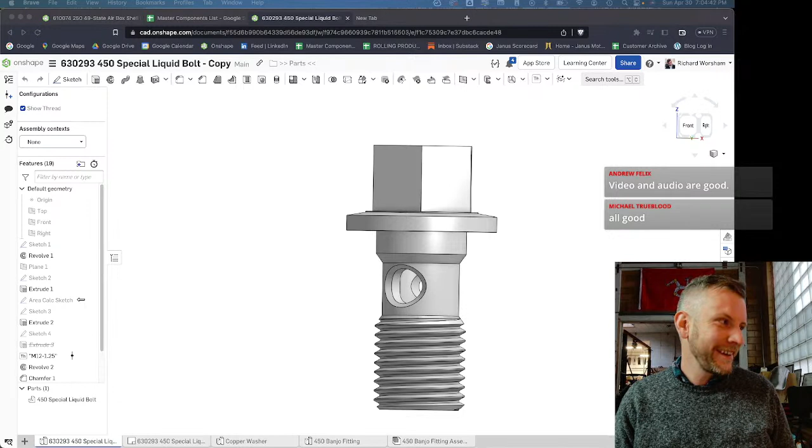I've been traveling a lot over the past week and a half. I went out last weekend and attended my high school's 20th year reunion, which felt like it snuck up on me, and it was big enough for me to make it back. I went to a pretty neat old school, and it was good to see everybody. Most of the people I had not seen since I packed up my stuff and left, but it was good to be back and to kind of reforge those connections.

But then I headed out, got back here, and then headed back to DC on Tuesday for an event with Google, which we had not really done anything with them in I think 5 years, since they did a video on us featuring how we use their products. And they had kept up with us. A couple of people on the Google film crew actually bought bikes, and we really had a good time with them. Treated them to some Midwestern fun, big bonfires, and they had, I think, got a lot out of it and appreciated not being in either Mountain View, California or New York. So it was a lot of fun.

Anyway, I went out there, got a chance to meet, not with the actual senators, but even the office of Rand Paul, because he's to the south. And the woman in the group I was with was from Kentucky, so she wanted to speak with her representative, and then we got to speak with our representative. Both of them represented by staffers, not by the actual politicians. But I got a little taste of Washington D.C. politics and the machine. So I'm glad to be back. Let's just say that, it was something else.

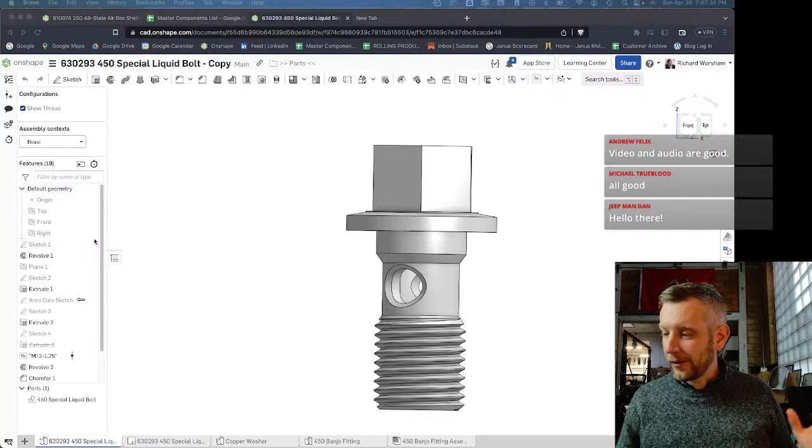Michael Trueblood, another good friend of the shop and a woodworker, he's got some cool features on his bike, says all good. And Jeep Man Dan, as always, man, you are the live stream, as Grant would say, true blue. So good to see you all on. As always, this is so much more fun when we have a conversation, so interrupt me, tell me what I'm doing wrong, whatever. I love having the conversation.

Anyway, we do have quite a bit to get through, but as always, I'm going to bore you all to death with a poem, and this time we're going to read. This one is kind of neat because, well first of all, it's Robert Frost, and we're not going to do Richard Wilbur this time around. It is about just working, and it's about the experience of working with other people and the unspoken rules of interacting with other people, and how you do that successfully or you don't, and the repercussions. So this is called The Code. It's a little longer than the ones I've done so far. I hope I don't bore you all, but if not, you can pause and come back when we get to design. We do have quite a lot of design work to get through, so I'll try and make this quick.

But I would encourage you—it's just, Frost is so good because it's blank verse. He just speaks, and it doesn't come across as overwrought or anything like that. So we'll go ahead and get started.

The Code, by Robert Frost. There were three in the meadow by the brook, gathering up windrows, piling cocks of hay, with an eye always lifted toward the west, where an irregular, sun-bordered cloud darkly advanced, with a perpetual dagger flickering across its bosom. Suddenly, one helper, thrusting pitchfork in the ground, marched himself off the field and home.

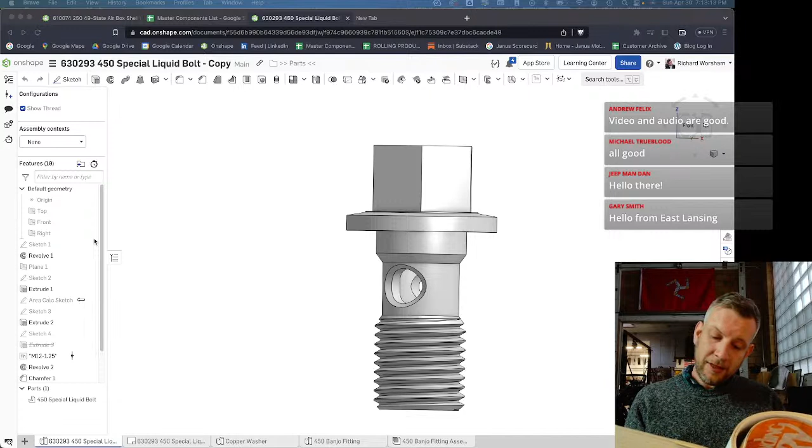They told me afterward. First, they forked hay, a lot of it, off of the barn floor. Nothing. They listened for him. Not a rustle. I guess they thought I'd spiked him in the temple before I buried him, or I couldn't have managed. They excavated more.

Go keep his wife out of the barn. And someone looked in a window, and curse me if he wasn't in the kitchen, slumped way down in a chair with both his feet against the stove, the hottest day that summer. He looked so clean disgusted from behind, there was none that dared to stir him up, or let him know that he was being looked at.

Apparently I hadn't buried him. I may have knocked him down. But my just trying to bury him had hurt his dignity. He had gone to the house so as not to meet me. He kept away from us all afternoon. We tended his hay. We saw him out, after a while, picking peas in the garden. He couldn't keep away from doing something.

Weren't you relieved to find he wasn't dead? No. And yet, I don't know, it's hard to say. I went about to kill him fair enough. You took an awkward way. Did he discharge you? Discharge me? No. He knew I did just right.

I love that one. I won't say any more. That's a good one. Okay.

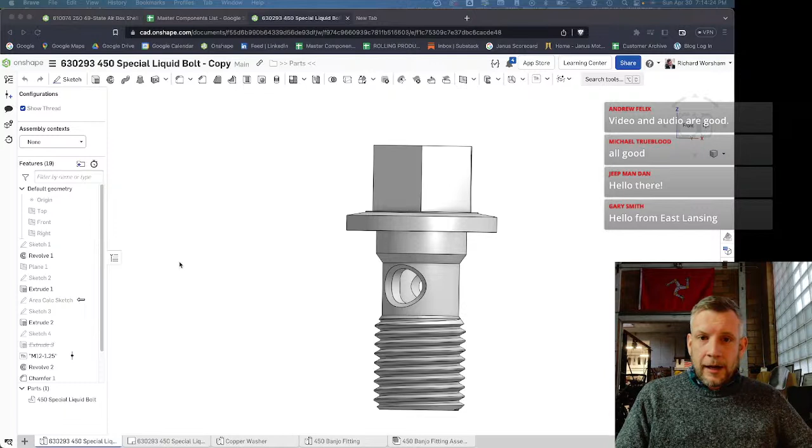Okay, let's do the hard one first. We're going to design, not the thing you see on your screen, which is this little guy, right? Let's see if I can show it here. An update to this. But instead, we'll get to that. We're going to do a part for an air box. Boom, if I can figure this out.

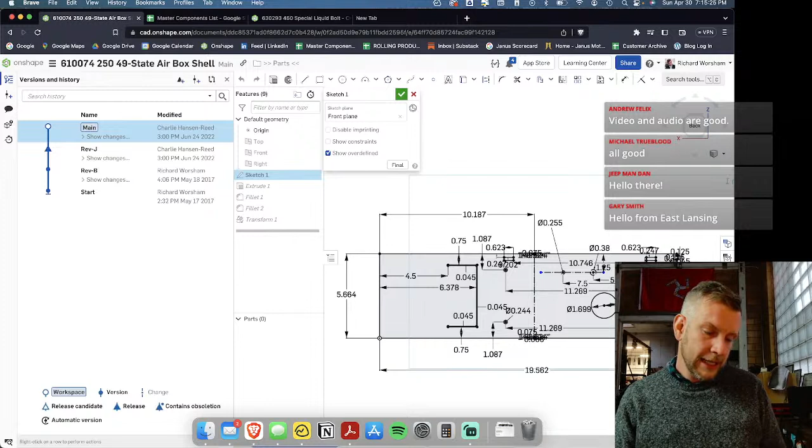I've done this twice, this is the 250 air box. Basically the problem is that the door panel is somehow, in the last year or so, something has changed in the way that we're making it, and it's slightly off kilter. So we have to kind of cheat it over a little bit. Ryan, our assembly lead, has tasked me with correcting that. I'm going to try and make sure it goes the right way, because the last time I did it perfectly, except it went even worse. So we're going to fix this, I hope. So let us get started.

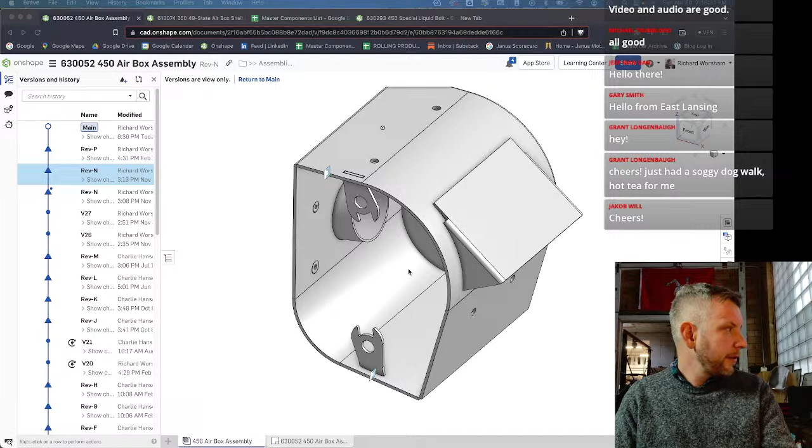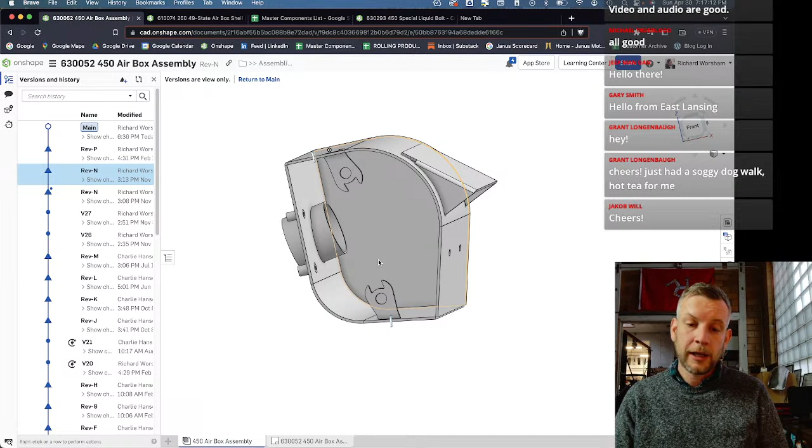It's a little narrower. It has a different slot at this thing right here, this little hood you see on the back that's yellow now, is actually the air intake. And it slides up in there, and then that prevents any gasoline vapor that's trapped in here from escaping. It's up high enough that gas vapor will always settle, and so it helps us with our California vapor, the evaporative emissions. Anyway, I'm just giving you an idea.

If we move these little yellow things that I'm highlighting yellow right now, they hold clip nuts, which are little metal nut clips that fit on and have a threaded portion. They hold those, and that's what you screw the door panel onto. And if they get off at all, then it can make the door not align properly. So I'm showing you on the 450 there.

We're going to adjust in the flat pattern because we haven't gotten up to, this is kind of a holdover from when we used to do everything in 2D. I haven't put it into 3D yet, which I need to get around to, but that would be a much longer Ramblestream if we were going to do that. So we're just going to correct this.

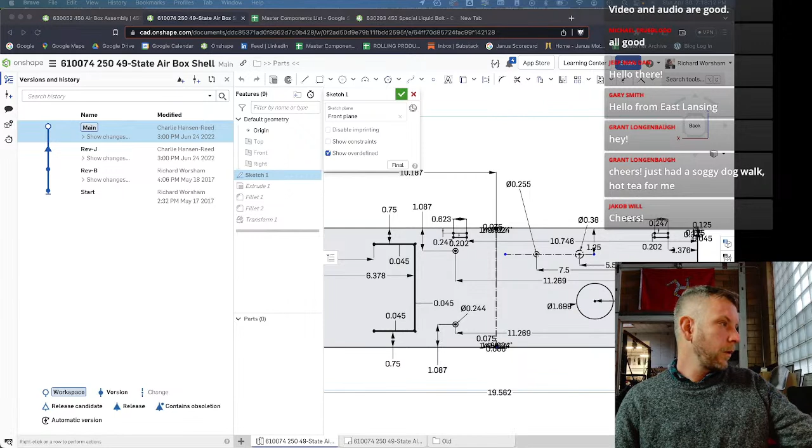So in order to do that, what we need to do is move, and I've already done the math here. We need to move these tabs essentially 0.1 inches over, and we're going to actually move it toward the left. Do you see these little slots here? I hope everybody can see what I'm talking about. I'll zoom in and you'll see. These position those little tabs that hold the clip nuts that then lock at the door.

Once this whole thing, with this big rectangle - I should really back up. This big rectangle you see is what we call a flat pattern projection of this. So if you were to unfold this piece of metal here, it would look... see what I'm saying there? See that little slot right there? If you were to unfold that, it would end up looking like this. So that's what we're doing.

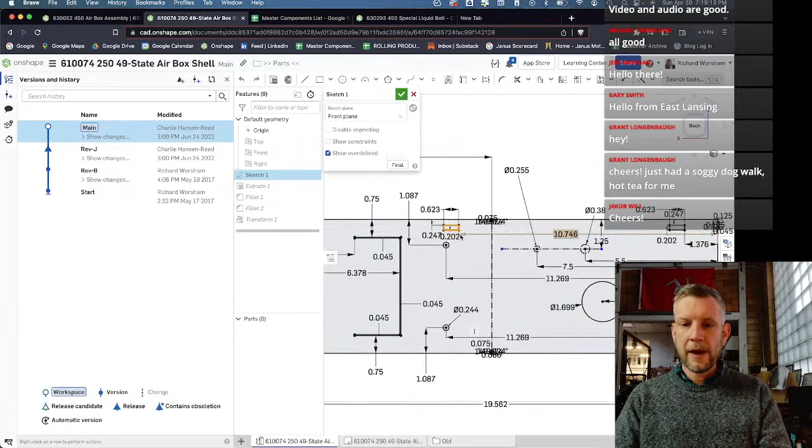So if I move these a little bit one way, it's going to help correct that door. We've already calculated that, so just so you understand. Now I'm going to go ahead and do that. All I have to do is add, we'll just go up by .1. There we go, did that one? See, all I'm doing is changing the dimensioning, redefining it. And we'll do the same thing here.

And that's pretty much it on that air box, I believe. And what we can do, just to be sure we're not messing it up, is compare. Let's see if we can compare it with what was before.

This is a kind of a cool feature in Onshape, the design software we're using, where I can compare two versions. You see I've highlighted - let's make sure y'all can see what I'm looking at here. Yeah, you can see the red and the blue there. The Rev J would be the last revision, made by Charlie on June 24th last year, and now we're updating it again. The red represents what that revision was, and the blue is now the main. We haven't released this yet, it's just where I'm working.

So if we look over here, I'll try and make this visible for y'all. You see, here's the piece we just modified, and there's a little slider up here. Can you see what's happening there? It's showing a comparison, just so you can visually check what you just did, and that looks perfect. We've moved from the slots being on this side, and now you're seeing, in reverse, the other side. So we've just adjusted those panels so that the door sits better.

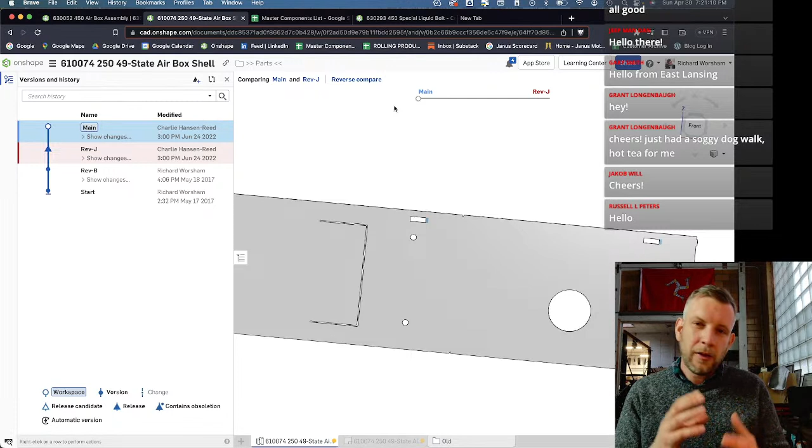I can't explain, none of us are really sure why it got off, but there was something in either the way it's being bent or welded that's changed slightly, and it's so consistent. It's been happening long enough that we know it's something that we can fix without it throwing off the other direction. So we're going to go ahead and do that. That's pretty much it right there, that was a really easy update.

We're going to go back to the main, get rid of the comparison. Let me see what the comments say. We got Jacob Will, it says cheers. Russell Peters says hello - hello everybody, good to see you all. Share what you're drinking, if anything.

So now we've got that up there. I'm going to go ahead and update the print. We'll just make sure this is good.

I'm going to increase the size of this revision block just because it gives us more room in the future to write a good description, and it also allows us to narrow those out.

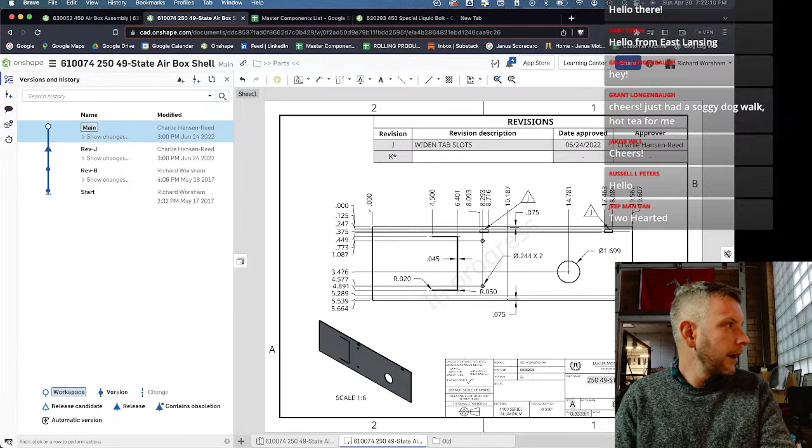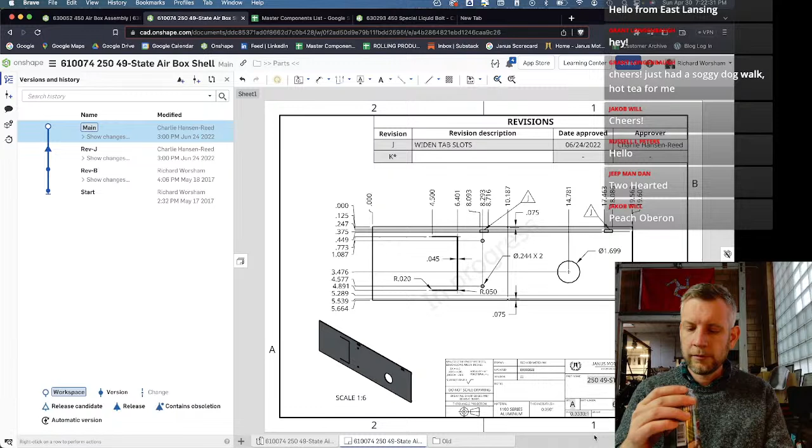Jeep Man Dan says two-hearted, a closer Michigan relative to the north. So that one, Two-Hearted is from Bell's, which is in Kalamazoo, or Comstock, and Founders is from Grand Rapids, I think. Yeah, Grand Rapids, I think. Yes, it's from Grand Rapids. I love All Day, and Two-Hearted is one of my personal favorites. Peach Oberon - Jacob, what's that? Oberon, Peach Oberon. Who makes that?

Okay, let's go ahead and increase the revision table. I'm just going to say adjusted. Remember, you don't put too much information, you just say you changed adjusted door tab slots. I'm not going to put any dimensions in there because the dimensions have automatically updated here.

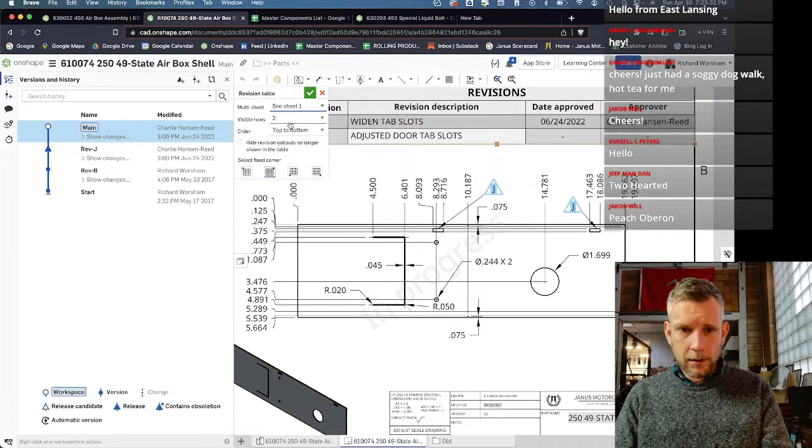I forgot to show you all, I updated it automatically, so they're going to be corrected automatically. And what we will do is make sure that we'll hide any previous ones, and then we'll add a K.

So this is what we're doing right now, is adding a revision callout. If you've been on one of these streams before, you'll remember that. So adjusted door, this revision is a revision table. It shows what's changed. So if the vendor is looking at this, they can quickly tell, instead of going through every single dimension and seeing what changed, you can highlight what's changed so that they know where to look. It just saves everybody time.

So in this case, we've made K as the number of this revision, or it will be when we release it. That's why it has a little asterisk next to it, and why it says in progress across the watermark. This little K will move down to where we have adjusted it, which would be this guy right here. We'll do that guy, that one, and then we'll put a second one on the other one. I'll just put it over both of them. Okay, does that make sense?

Everybody tracking? Oh, here we go. We got a lot more comments.

Jacob Will says only available at Bell's. So Oberon, I should have guessed, is a Bell's. I have never had their peach Oberon, but he says that it is only available physically at their Comstock location. Nice, you must be from Michigan. Gary Smith is drinking Diet Dr. Pepper. Cheers, Gary.

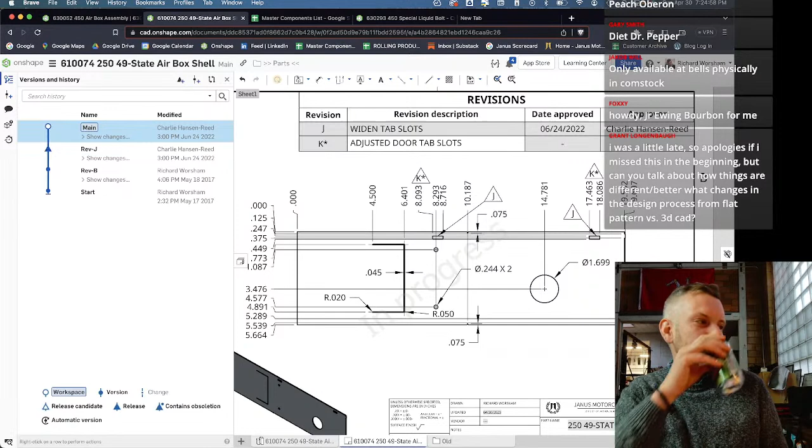So Grant says, I was a little late, so apologies if I missed this in the beginning, but can you talk about how things are different, better, what changes in the design process from flat pattern versus 3D? That is a great question.

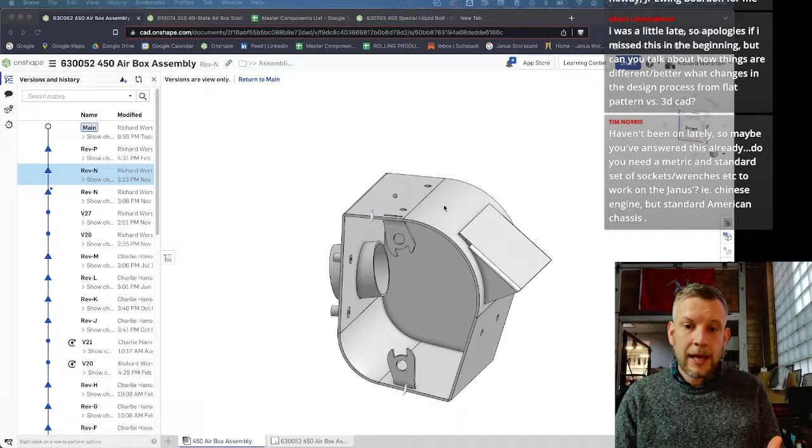Let's go ahead and I'll keep talking while I release this. The difference is that, like I showed you with this, the big 450, here's the 450 airbox assembly, this part has all the, so you see all these bits that are in here, in this final assembly. Each one of those final assemblies, or those pieces that go into the final assembly, actually is a part. So if I right click, this is really cool.

If I right click on this, open linked document, we're going to be taken to the flat pattern or the shell, which we were just adjusting on the 250. This is the shell for the 450. So every part in that 3D model actually is a piece, and we can actually assemble them together to make the part. And then it actually represents what is built very, very closely. And if it doesn't, we can make corrections.

So it helps us to be, in the old days when we were designing on paper, we realized very quickly that what was built and what was designed were related to each other, but there was a lot of difference. And so when you went to make a design update, you couldn't just do it off of your previous designs, like put another piece of trace paper on the board, trace what you did before, and then modify it. You had to do that, but also adjust it to match the as-built or the physical reality.

So what we're trying, by moving to 3D, we've been able to have the virtual design perfect, or if not perfectly, very close enough, match what is built, and then keep adjusting it. And a big part of that, like we talk about in one of our videos, was making sure the tooling is really good. So those two things have to be done simultaneously. You can do the 3D design and trust it if your tooling is accurate and repeatable enough to be able to produce the same part every single time.

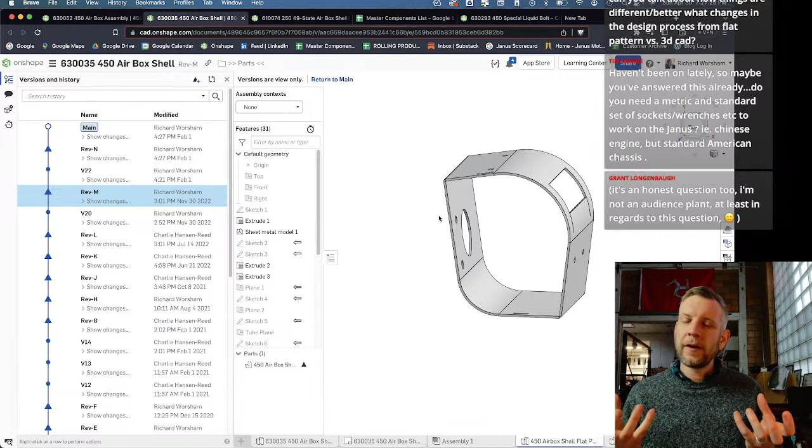So when we moved to the 450, we were able to do both those things, which is why the 450 is really the first of our bikes which is completely designed in 3D CAD, in this case Onshape. If you look at the 50cc, it was basically on paper or on the shop floor.

There are no prints for most of the 50cc to the 250, but there are prints for most of the parts, and we've updated almost all of them, many in 3D. This airbox, for example, has probably been updated. Let's go see real quick - the 250 airbox, not the 450. It has a Rev J, so let's say it's got 3 revisions, it'll have a 4th when we're done here. It hasn't really been updated much, just small things we've had to tweak along the way.

So that's one of the benefits of moving to 3D. It makes the design process faster, even though it takes more work. It allows us to be forward thinking - to adjust designs based on feedback from assembly, fabrication, customers, salespeople. We can make fine-tuned adjustments on the fly and release prints to vendors very, very quickly and easily. So there's your answer, Grant.

Tim Norris, haven't been on lately, so maybe you've answered this already. Do you need a metric and standard set of sockets, wrenches, etc. to work on the Janus, meaning Chinese engine but standard American chassis?

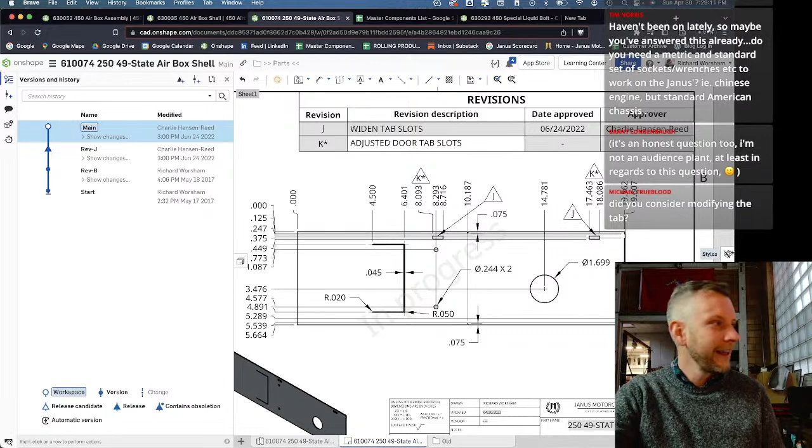No. We did talk about this in the last episode when we were designing a part, which I actually need to show you all. I'm going to get really sidetracked - we're going to get almost nothing done today, I think it's already half an hour. But I do need to show you this. Do you remember the part we designed?

Let's pull it up here real quick. We designed a machined component for the California carburetors, which has got to be here somewhere. Here it is, right here. And it was a lot of fun.

There were some great suggestions from several of you who are machinists, recommending this should be tapered slightly, and you were absolutely right - it did break a little unpredictably. Basically this is a small part we use to tamper-proof carbs for people in California. Sorry, California folks - if you want to change that, talk to your representative.

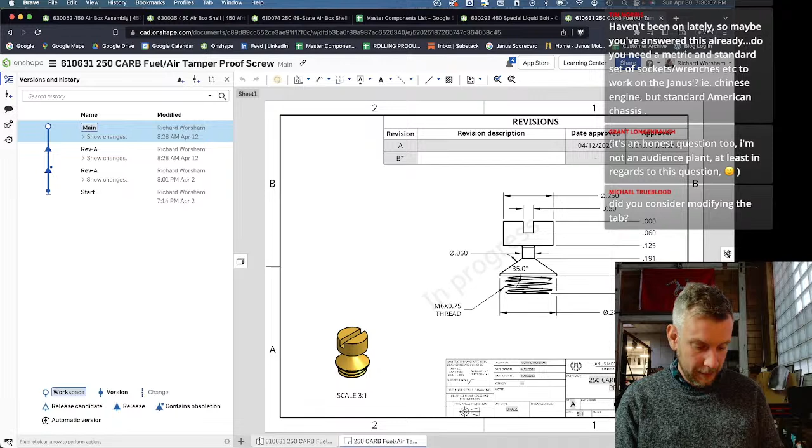But anyway, we had it rapid prototyped very quickly by a local machine shop, and I'm going to show this to you all, though it's going to be kind of hard since it's really small. Let's see if the camera will focus... come on, camera... there you are, there it is.

Beautiful little brass piece - there is the finished product for you all to see. I'm very pleased to say we sent it to California and they tested it and could not tamper with our carburetor, so it is tamper proof. That worked. There are some small adjustments I'm going to make so it breaks more accurately - the idea is that the screw head, at a certain torque, breaks off and then it can't be adjusted. So there you have it.

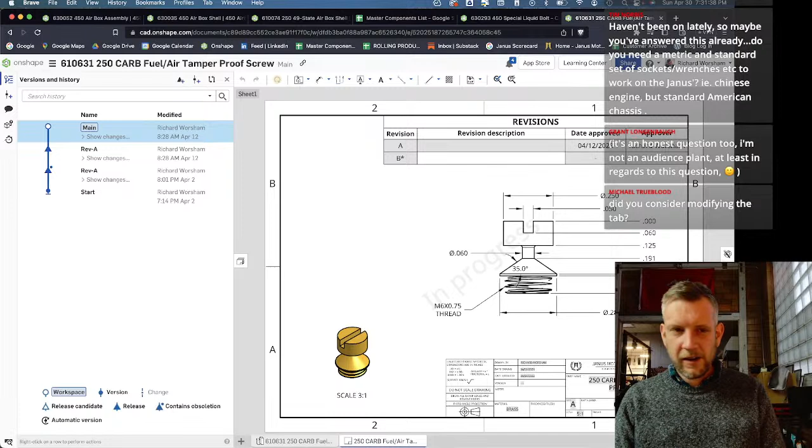So anyway, where was I going with that? Oh yeah, standard and metric. Everything on the bike for maintenance - everything, I mean 99.99% of everything is metric. I only took metric tools with me when I rode cross country. That's all you're going to need. There are a very limited number of standard, especially machined, things we make - like the top nut on the forks, which I think we copied off an older bike and it was standard. But that's very, very minimal - nothing you're ever maintaining or working on with the bike. So metric tools are good.

Grant says it's an honest question too, I'm not an audience plant. Oh yeah, you are. No, he's talking about the 3D design.

Michael Trueblood asks, did you consider modifying the tab? Oh yes, we could have, but we use it on several bikes or different models, so that could have gotten us in more trouble. It's just easier to change the shell.

Dannie Fowler says he's listening while on the road to Goshen, picking up 962 tomorrow. That is fantastic, we look forward to seeing you, Danny. Safe travels, and I hope you're not imbibing a beverage of alcoholic nature while traveling. That's wonderful. Okay, let's get back to this, if we ever finish. Where were we? Oh, here we go - we're going to release this real quick.

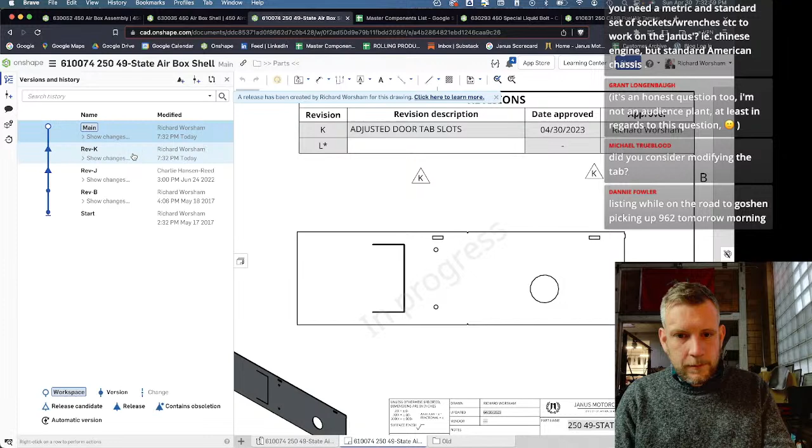Real quick though, there we go. Rev K. Boom, release. There's my phone binging - it means there's a release.

All right, we're going to go to Rev K. We got to click on that, close that little tab there, and you'll get to see this is the finished version. Now the K up there doesn't have an asterisk - there's no watermark. Even when you click on the K, it'll highlight those. It's ready to go. We're going to go ahead and export it, and we're done.

Okay, we can move on. Gary says, congratulations, Danny. Welcome to the family.

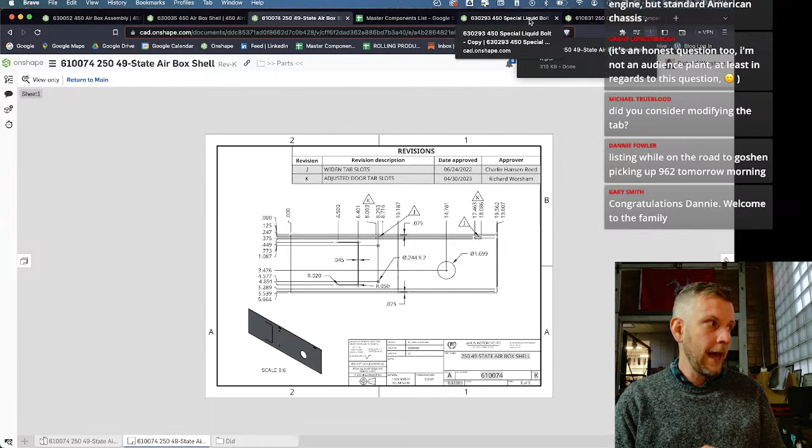Absolutely. Okay, once this is finished, we're going to move on to another awesome part, a machine part. This is going to be much more similar to what we've been working on already - this would be a lathe turned part, and that is this.

We're actually not using this one - we're going to be doing an update to this. I don't know if you can see, it's not going to focus. But anyway, this is actually a part that Charlie designed, which is manufactured by BrakeQuip, which makes a lot of our oil line components. And they make this just for us.

And it has - let's pull it up here. Here's the CAD file, so this is the work of Charlie. He's done an awesome job on this part. This is essentially a banjo bolt for our oil cooling system.

And we have that made - I'll show you right here. So if you have a 450, it has an oil cooler, which is located essentially where the horn is on your 250. It provides a little extra cooling for the oil in the 450, which just makes it more reliable.

That was also one of the things SWM did when they bumped up the XR400 to 450cc's, an extra 50cc's - they just decided to add that. I think they were basing that on the fact that an oil cooler was a common upgrade on the XR400. That was just common - I think they did have, in extreme conditions, an overheating potential. So it's really good to see that they took that initiative.

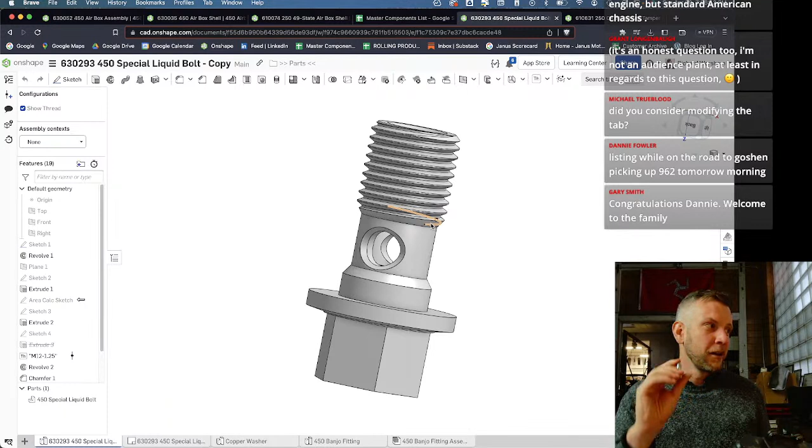What if you see the title up there in the corner? It's called a special liquid bolt, and that's because that's what the Italian translation of banjo bolt is - they call it a special liquid bolt in the Italian handbook, and we thought it was really funny. So we have a special part number, it's being manufactured by a U.S. manufacturer, and it's called the special liquid bolt. But anyway, there are just two of them, and they're the same length on each side.

So one side, hot oil coming straight from the engine comes in, picked up by the scavenging pump, and gets pumped up in here, and then it gets fed out the other side. One of the things we've been wondering about is: are we getting enough cooling that way, or are we getting the full amount that we could?

So one thing we've been experimenting with is, what if we had a taller bolt on this side - a standpipe essentially - that gets that oil up to the top, so that it's not... What can happen is something called heat channeling, where the hot liquid, in this case oil, can create a channel where all the hot oil goes through, and the rest of it just stays cold. In which case you're losing the potential cooling capacity of this, essentially a radiator, which is the oil cooler. So we're thinking, what if we add a taller one and we can prevent that from happening?

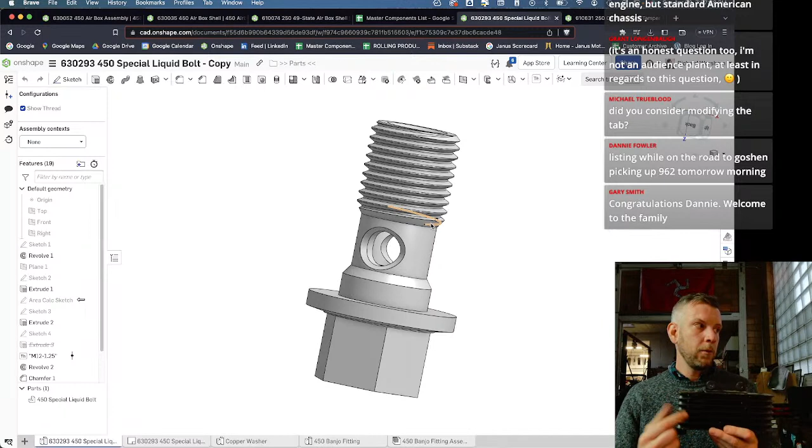So what we're going to do is actually design a taller version of this bolt. It's really simple, and since Charlie has already done a lot of the hard work, I'm just going to - you can see here at the top of this, it's called copy - so I just duplicated his file, and we're going to modify the design and make it a little bit taller so that it will carry that oil up. Take a quick look at some questions here.

Dannie Fowler, oh yeah, we got that. Michael Trueblood, I'm assuming those slots are cut into a flat piece of aluminum.

Could it be that you changed the procedure of bending the metal and that threw off the slot and tab alignment? Exactly, Michael, that's my first guess. First of all, it is a flat piece of aluminum that's got all that laser cut into it. For the most part, if something's laser cut, you don't have to worry about it being off. Now that is not always the case. We've definitely had laser cut orders come in that were wrong. I don't know how it happens, because they should be working off a CAD file. Well, they are working off a CAD file, they should be the right one, but sometimes they're off. Most of the time we can say pretty definitively that it's not the laser cut being wrong, so yes, it's very likely that something in the forming process or the welding process threw that off. Because it's been happening for so long, months at this point, we know it's consistent, and if we make a change it's going to resolve that problem. So by modifying the shell, that's actually the simplest way of going about that.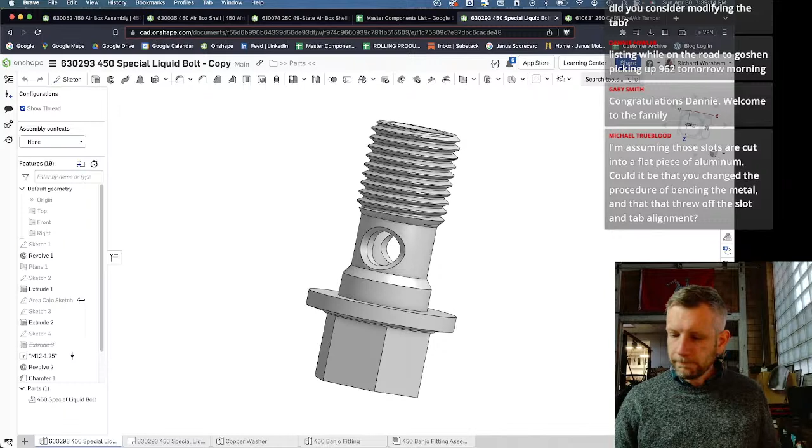Hello, Adam. Adam was an intern. Adam, was that two summers ago? How many summers ago did you lose your mother's Costco knives at our shop? I think it was two years ago. Adam, you are at Purdue. Summer 2021, yeah, that would be two years ago. Remind us, what are you studying at Purdue? Some kind of business, if I'm not mistaken. Anyway, good to hear from you, Adam. Good to see you on. Glad you could make it.

Okay, let's get started. First up, we're going to change the part number so we don't get confused. So let's create a new part number like we do.

So for those of you who have not watched this before, this is the secret file. We run everything off of Google Sheets, as some of you may know. This is the Google Sheet with all the part numbers for everything. So this one, 6100, is this tab. This one is 6300, this would be all the 450 part numbers. This is 61, and you can see all the hundreds of parts that go into, in this case, a 250.

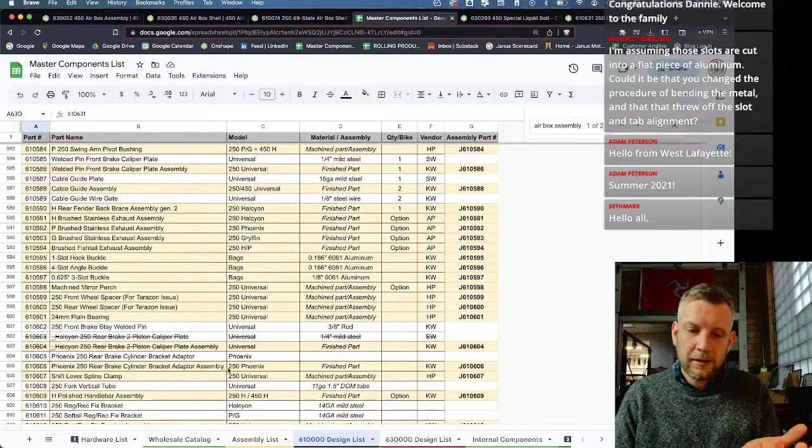But actually we do need to be over in this, we need to be in the 450 list, because this will be for a 450. So let's go ahead and drag down, we're going to get a new part number. This is going to be 450 special long liquid bolt. Oh, here we go, this is a great opportunity for me to come up with a really ridiculous part name. I always manage to, the front forward upper left fender tab, confuse everybody. No, I'm trying not to. This is 450 universal, that's what that means. It's not 451, that means it can be used on all 450s because we only have one.

And this will be a machined part, so it's going to be, we highlight them this color. Let me grab machine, there we go, grab that. And then we'll grab that. Grant will make fun of me for my sheets techniques here, best practices.

We got somebody else on, Seth. Hello, Seth. Seth was on our live stream on Friday, as were some other folks on here. Jeep Man Dan.

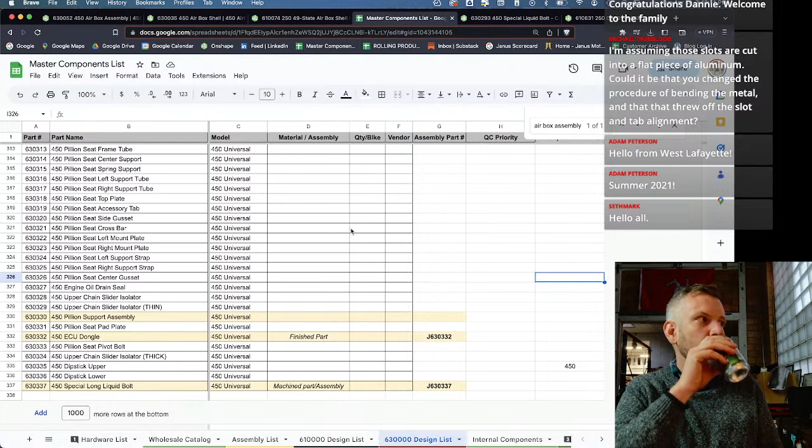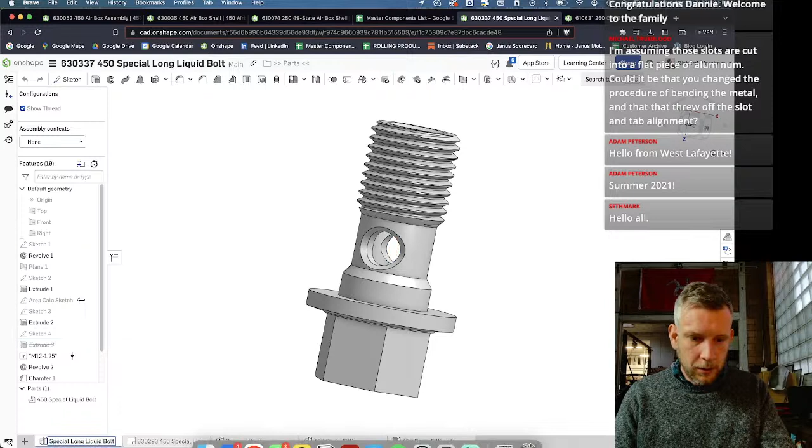Okay, so we got a part number. Let's see if we can get this done in 15, 20 minutes, we'll see. Okay, special liquid bolt, okay, we're going to rename it up here. We just pop that in there. Number 337, 630337, so 6300 numbers would be 450s. And then we're going to rename the tab to, and actually this one as well.

Okay, there will be some print updates that need to happen, but anyway. Okay, so I have not gotten in here before. I did not do the homework to see how Charlie did it, because a lot of times, I think I've talked about this before, there's a lot of different ways to design a part, and not every designer has the same way of doing it, and Charlie and I certainly don't. His is probably, speaking of best practices, probably way better than mine as a trained engineer.

But you have to kind of get in this feature list over here, this is the flow of how it's designed, if you can see over there on the left of your screen. Area calculation - oh, he's actually calculated the oil flow to make sure it's correct. So there's your engineer for you doing it right. But in order for me to modify this...

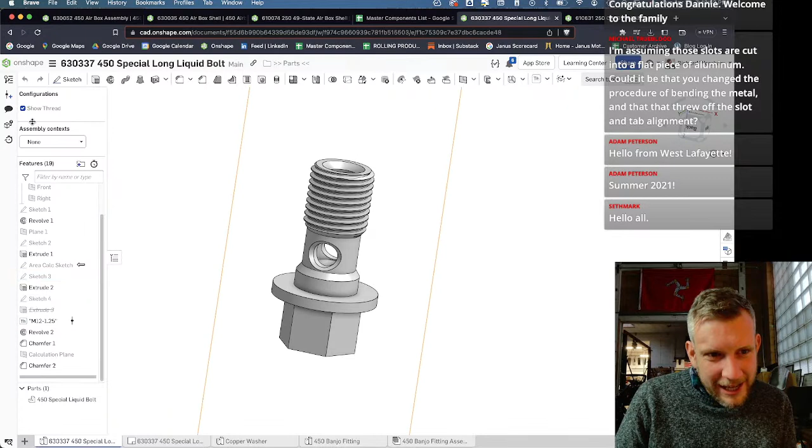I'm wondering if I should just add a sketch at the end. Let's try this - this might be really easy. So I'm not going to assign a length to this, I'm just going to make it longer, and we can define it in a minute based on the radiator or the oil cooler that it's going in. You see what I'm doing now is I'm just adding a little bit of... oh, I didn't want to add that.

Let's try this. I'm not sure this is the best way to do this, but yeah, it probably is. We'll see. Okay, so we've basically extended that up, and let's see what happens when I... boom, there it is. Okay, so this Onshape is so smart, it knows to include that part.

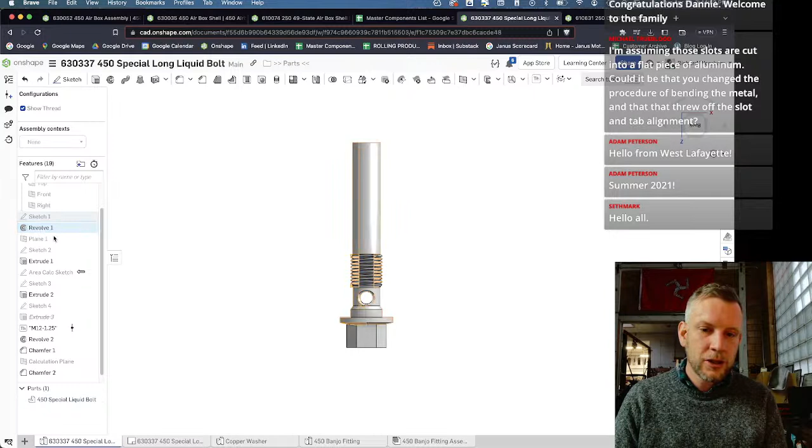What I didn't show you all there was I added a revolve, or it automatically added a revolve. So it's taking that sketch, which is this, and then it's rotating that sketch around this dotted construction line to create this. So you see what I'm looking at here? Before, if we didn't do that, let's go back - it would look like that. By adding it, it goes up like that.

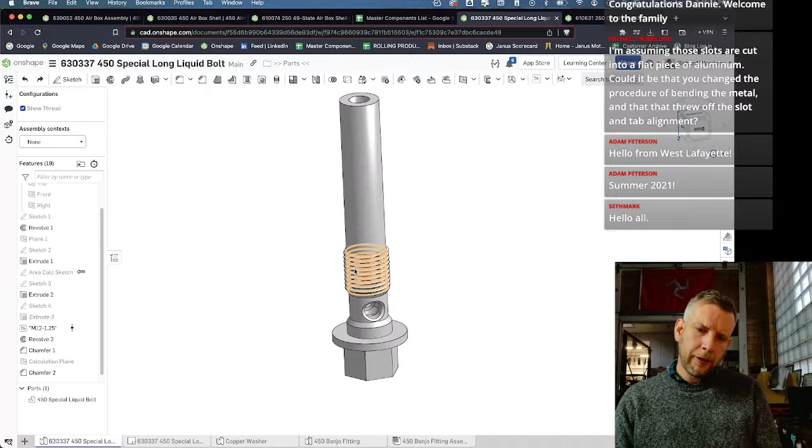There would definitely be some questions here on the threading, the correct how the threading is done, and if this would be a smaller diameter. It's going to have to be smaller diameter to allow this, because this has to pass through the threads.

So if we look at the root diameter, which is this right here - Jeepman Dan asks, is this new longer bolt just for heat testing purposes at this time, or will this bolt be the new one going forward on all new builds? Just wondering if we can purchase it. That is a wonderful question.

If it works as intended - yes, this is not something at this point that we are moving into production with. We've done some experimentation with it, and Woody has done a great job of testing this. He went on a longer ride, and he had a bunch of thermocouples hooked up on this thing, and we basically brazed on a piece of brass tube to the top of one of these guys to simulate what this would be. And he has determined that there is a benefit to - we are seeing cooler temperature, or a greater temperature difference across the oil cooler with the standpipe. We don't really know if it's worth all the trouble at this point, or the cost, because they're running fine. This is not something that we're doing because of any sign that the engine's overheating, but it would be nice to take advantage of a radiator more fully if we can.

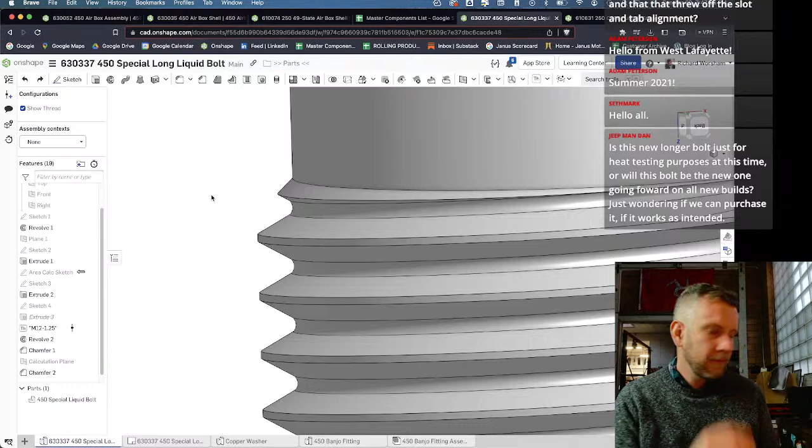I hope that makes sense. Yeah, oh yeah, he says yeah, thank you, yep, that's definitely the idea. So, should this prove to be beneficial, we will absolutely offer this to existing owners, and we'll go through the right process to install it.

I'm assuming the best bet would be, hey, you're doing your next oil change, drain your oil, while you're at it, pop one of these on there. Or just remove the existing one - probably want to put new, we'll supply it with new crush washers. Reinstall it, torque it to the right spec, and when you put your new oil in there, check to make sure it's not leaking, and you're off to the races with an engine that I hope will be running cooler, which will be a good thing.

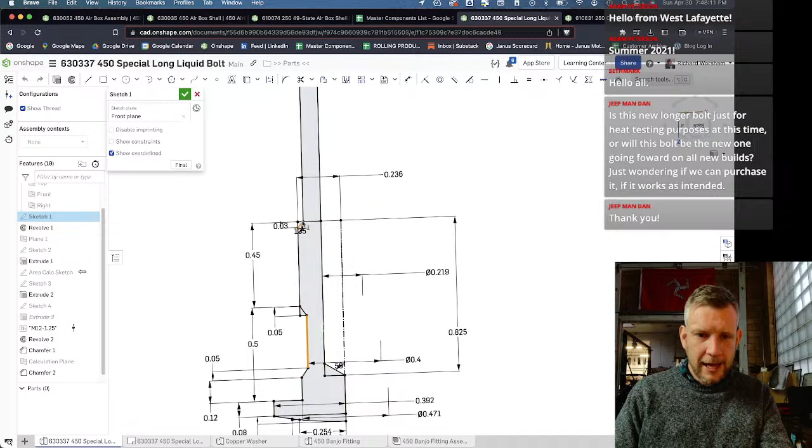So anyway, we're just taking a look at these root diameters here to make sure that this portion will fit through the hole so that it gets up in there. So I might undersize it a little bit more just to provide ample clearance. What you can see here is that, yes, it actually does line up with the root, but we might just make it a little bit smaller. So I'm going to go over here, and we might even make it some kind of dimensional size.

I'm just trimming this up, making sure this is vertical. Okay, so it's turned blue because I haven't defined it. Before it was on this point, which was defined. So at this point, we'll give it an actual dimension.

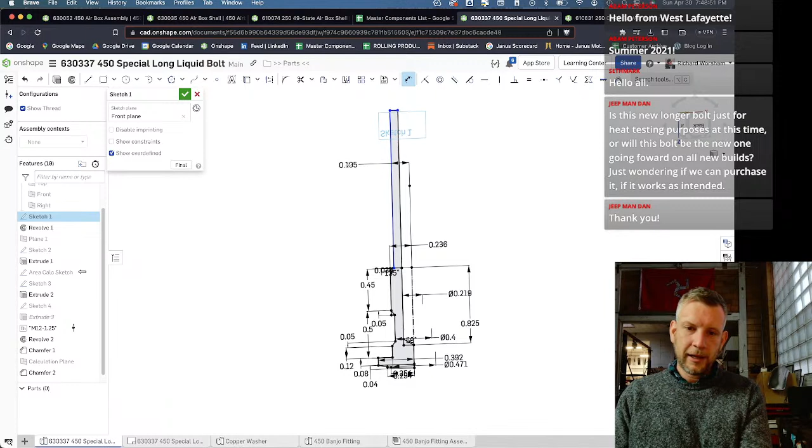If we pull that dimension off of the center line, or that construction line, it actually gives us the full width, rather than just the half. On this side it's showing half, but on this side it's showing the full one. So let's say if we made it 0.4, would that get us where we want to be? It will - a little bit undersize of the root diameter of the thread, so we know it's going to get through into the radiator. Now we need to check out the length.

For that, we're going to take the length off of the oil cooler. I'm assuming both of these are the same length. We're going to use the bottom of my trusty old dial caliper - I bought this at a flea market in Illinois about 8 years ago, and it's pretty accurate for most of the design work I do. If you take the base of that and stick it in, if you have anything like this, then you can just close it down. That gives you another way of using it to measure.

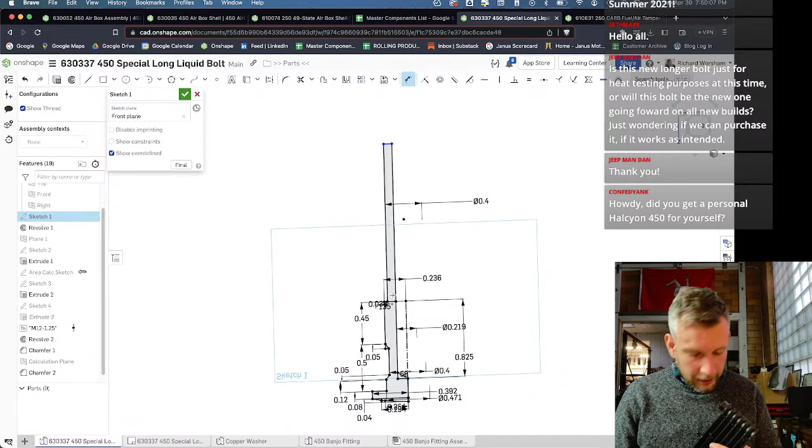So we're getting - and this is funny because a lot of the design work we do is in inches, so it's kind of weird that we're not using millimeters, but we'll do this one in inches just because that's the way I do it. Crossing my numbers - 3.84. That was that side. Let's just double check that it's the same on both sides.

Just making sure on this one again - .84. Huh, it's a little deeper on that side.

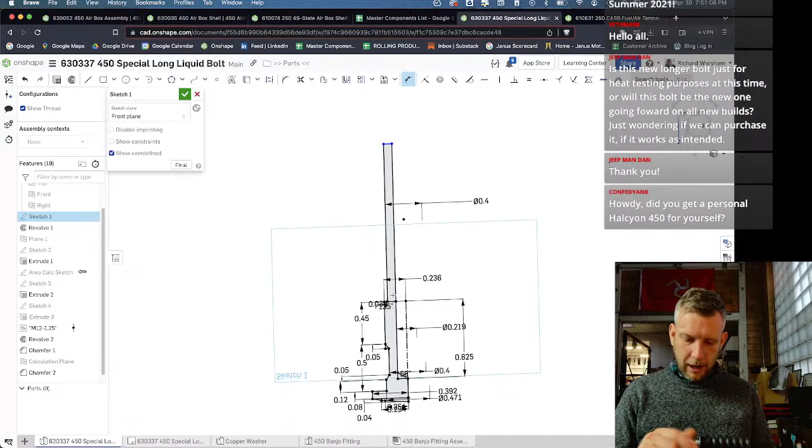So that is going to be from the underside of where the banjo is on that. We need to make sure that we are measuring that properly. I'm not going to go anywhere near the actual top - I don't want to create any restrictions, so we need to probably leave at least the diameter, the ID of this tube, around the whole top. Just a rule of thumb, but let's say we're going to be .3.

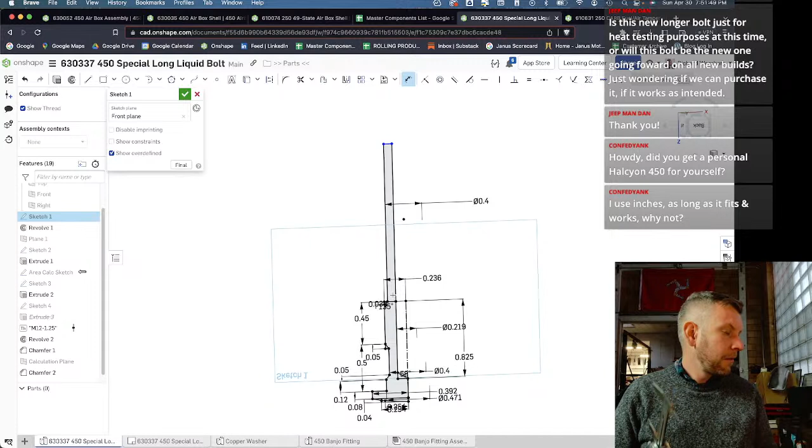What does he say? Okay, we got more people. Confed Yank - howdy, did you get a personal Halcyon 450 for yourself? I don't have my own 450 yet. I have a 250 that I ride every day, but I also ride the 450. I was just telling Grant that I need to spend more time on a 450 - do a long trip and really get familiar with them. I'm not as familiar with the 450 as I am with the 250, which I have many, many miles on and love it to death.

Confed Yank says, I use inches - as long as it fits and works, why not? As long as it does, as they say. Let's see - if you're converting to metric, I would consider running to the hundredth. 1 millimeter is 0.039 - that's a bunch off. Yes, 0.039. Oh yeah, that makes sense. Yeah, I see your point. Yeah, that's a really good point. I definitely need to not do standard on the width of a metric part. So yeah, you're absolutely right.

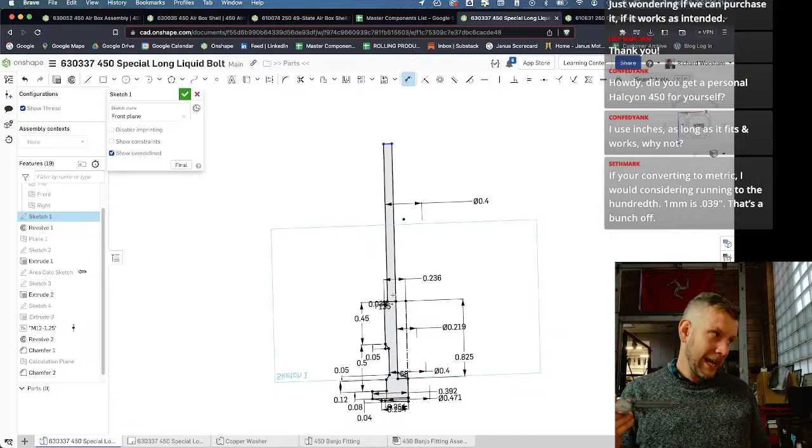Let's just make sure I'm getting this depth right. Measure 8 times, design once. 3.83 - yeah, that's gonna come in. Okay.

Sorry, I'm off camera here for a minute, but I just want to make sure I get the right length. All right, let's change this guy first. But we're just going to do...

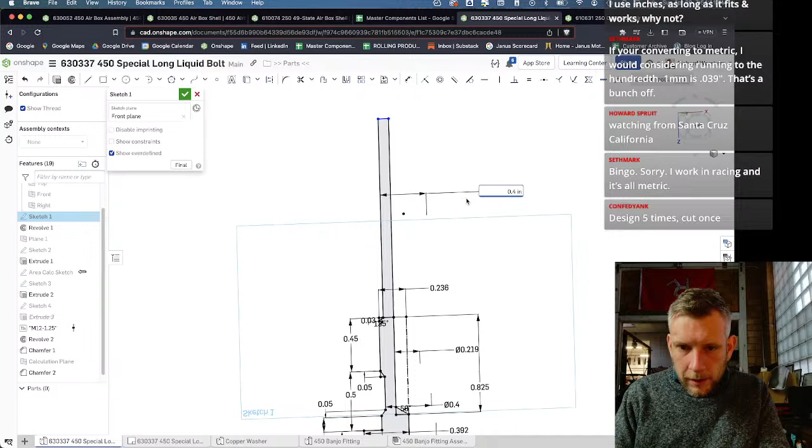Yeah, 1 millimeter is... what did Seth say? He says, I would consider running to the 100th. Yeah, 0.039. All right, we're going to do... we'll just do 10 millimeters. So the nice thing about this is you can just convert it to millimeters, and it automatically goes in there. So for our purposes, that's great - it's going to be more consistent, and it'll all be in the same dimension.

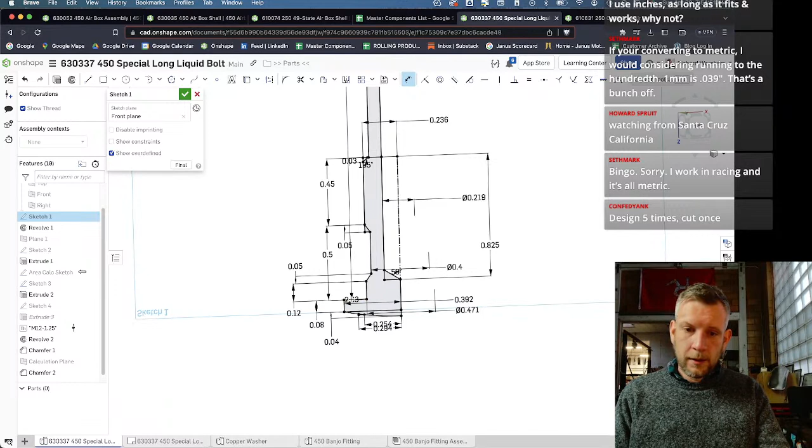Good, great point, Seth. Okay, so now for length, I'm going to take this - the standard, at least that I'm aware of, is you take it to the underside of the head of the piece of hardware, because that's what's going to snug up against. Now, obviously in this case there are 2 washers, one on top of the banjo and one below it, that you need to also factor in. So we need to do that.

Just want to make sure I got this right. What time is it? 7:55. I think we're not going to probably get the print done, but let's real quick.

It's Howard Spruit. Hey Howard, how's it going? Watching from Santa Cruz, California. Great. Seth says bingo, sorry, I work in racing, and it's all metric.

Thank you for your suggestions. Confed Yank says, design 5 times, cut once. Yeah, exactly. For me it's design, measure 8 times, design once, and then design it again when they ask you to.

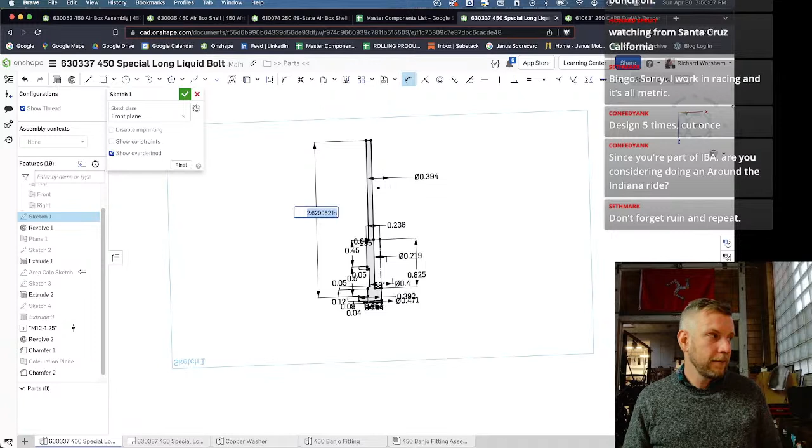Confed Yank, since you're a part of IBA, are you considering doing an around the Indiana ride? So what he's asking about is IBA, the Iron Butt Association. We just did a podcast this last week with Tim Masterson, Iron Butt aficionado par excellence. He got me into iron butt riding. And actually all the IBA rides I've done, 2 saddle sores and a Wyman ride, have been like out and back, like long. Well no, I take that back, around Lake Michigan, we did around Lake Michigan and ended up back here.

But if you do those long ones that are so far away, if anything happens, you're a long way away, and then you have to get back. That was the thing when we did New Orleans. Getting back was brutal. It took us like 2 days, and we were already sore. We didn't have that goal of getting it in 24 hours, so it was pretty brutal to get back, and we had to get back for work and everything.

So doing around Indiana, you can do 4 corners, and that's probably the next one I want to do. Is either that or it's so risky doing Lake Erie. We've done Lake Michigan, but then you have to get into Canada, and you can have some kind of delay at the border. So I think an around Indiana would be very, very fitting. Yeah, that's a great suggestion.

Seth says, don't forget ruin and repeat. Yeah, design 5, measure 8 times, design 14 times, remeasure, and then ruin it. Michael Trueblood says Thunder in the Valley. I've never been to Thunder in the Valley, but it sounds like a lot of fun. I think you have been, right?

Seth says, I used to take an old Chevrolet on 1,000-mile plus drives. I learned early on that a credit card fixes all. The nice thing about a Janus is, certainly with my experience with a 250, it doesn't cost much. You can fix anything with the tools on your bike on the side of the road for most things. Obviously you don't want to bend your rim or something like that, but for most things you can fix it pretty cheaply.

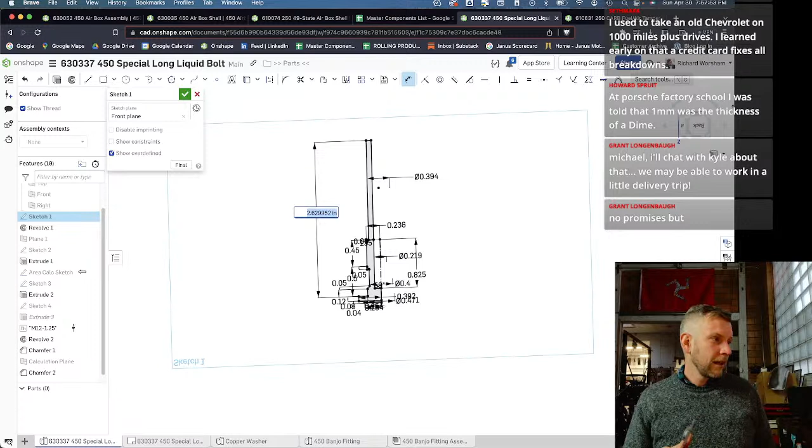Howard, at Porsche factory school, I was told that 1 millimeter was the thickness of a dime. Probably is. Hold on, let's confirm that. Do I have a dime? I have a penny, I don't have a dime. Wait, it's because I used all my dimes.

All right, we got to keep moving here. Michael, I'll chat with Kyle about that. We may be able to work in a little delivery trip. I think he may be talking about Thunder in the Valley. No promises, of course.

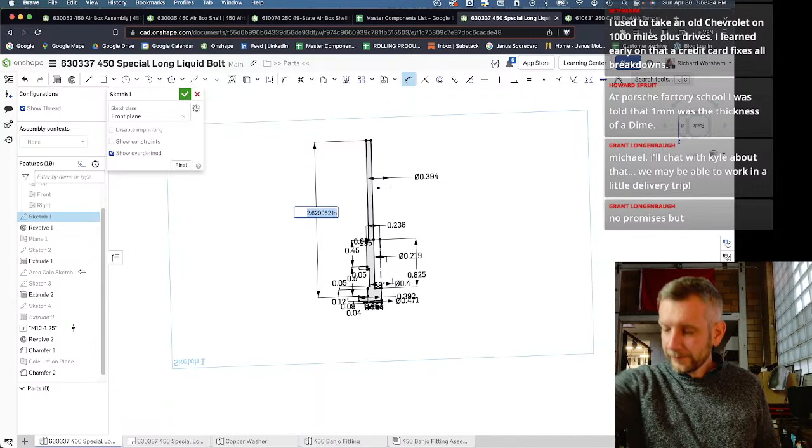All right, so we've come up with an overall length, which I need to finalize here. I'm talking too much, that's actually why these are fun. It's not the design part, it's the talking.

I think to be safe, we're going to allow ourselves plenty of clearance, and we're going to make this 100 millimeters, or 10 centimeters, which is a good round number, and it gives us plenty of clearance off of well, that's tall. Woo. Let's see what it looks like. There it is.

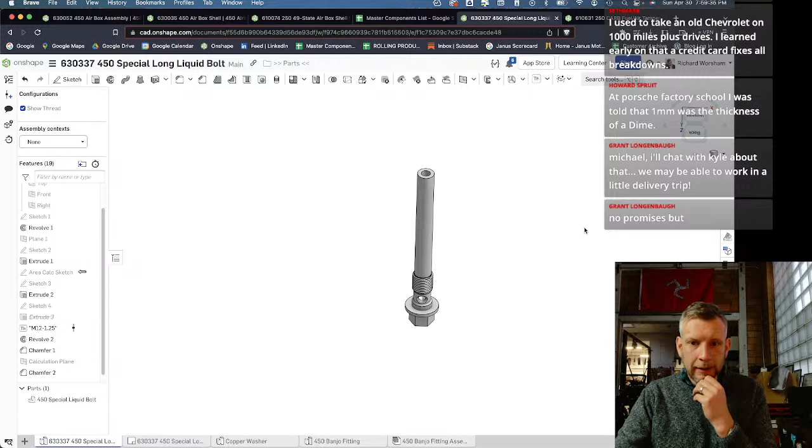So anybody on here, machinists, let me know what you think. Does this look crazy? I might put a little chamfer on the top. Just, there we go. All right.

Looks pretty good to me. Thunder in the Valley, the Maggie Valley, the Maggie Valley Rally. I don't know, is that the same thing?

Seth asks, Richard, do you remember how to set points? Talk about a measurement device from the past. Yes, points, I do. I've done a lot of points gap setting in the old moped days.

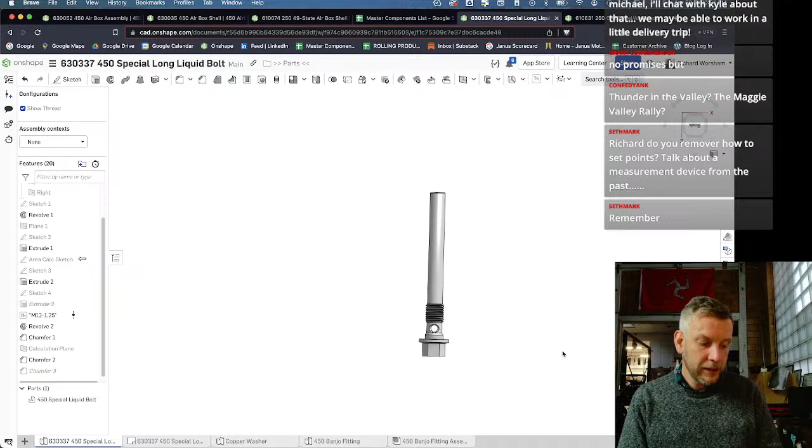We would have a little light box, and now every Janus we've ever made, even the 50cc, has a CDI, so it's electronic control of the spark. But on all the old vintage mopeds we used to work with, including the Paragon, the first bike that got us started, we did put an HPI on it.

So essentially a CDI on that bike with a curve. But in the old days, yes, we would absolutely do setting your points and setting your ignition, and use a little bit of sandpaper sometimes between them to clean them off. Yeah, absolutely, matchbook cover was 0.03.

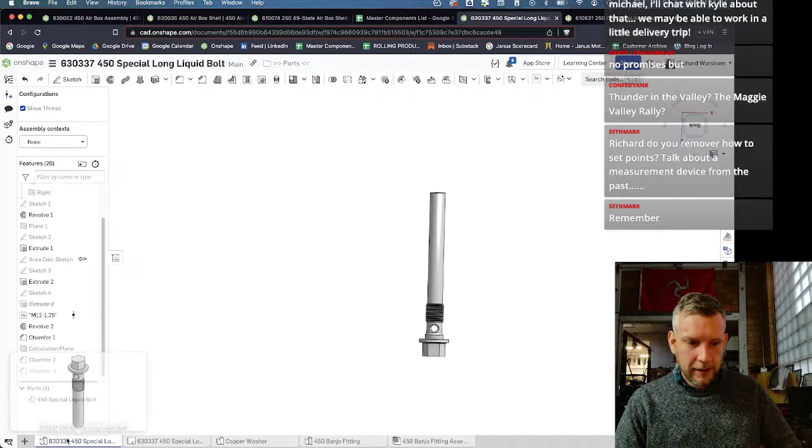Okay, let's update this print. So we've got the part number. Let's see how fast we can do this. It's 8:01, I'll see what I can do.

This is going to take some redesign. So yeah, see, there it is. So now it doesn't fit our print anymore. But let's see here—y'all can leave if you want, but I'm going to try and finish this guy up real quick.

So we're going to change the scale. It doesn't need to be 1:1 for this, so let's go ahead and do the overall scale for the whole drawing. We're going to change that, go to properties. Oh yeah, it's way too big, so we can go down to 1:1.

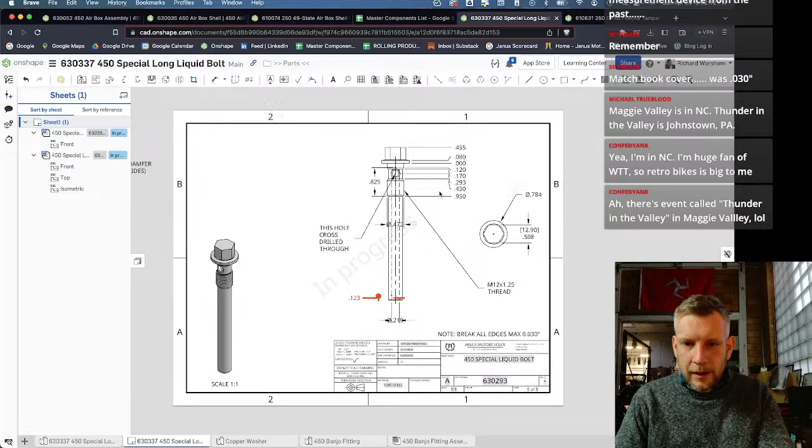And then this guy, we'll go to 1:1 too. Oh, it's 3:1, doesn't need to be that big. There we go, 1:1. And see how all those dimensions update?

Onshape did not used to be able to update that easily. It's really gotten a lot more advanced over the last couple of years. But it sure is nice to be able to use an existing design and not have to redo all the dimensioning. It's wonderful. Okay, so let's just see what we've got here.

All the overall dimensions are going to be similar. I'm going to keep the threading the same, but we're going to add a new dimension down here to the end, so there's your overall dimension. Do we need any others? I don't think we do. Got that dimension.

We've got a detail here of the end of the head of the bolt showing the hex head and the width of that. It's called out in both millimeters and inches.

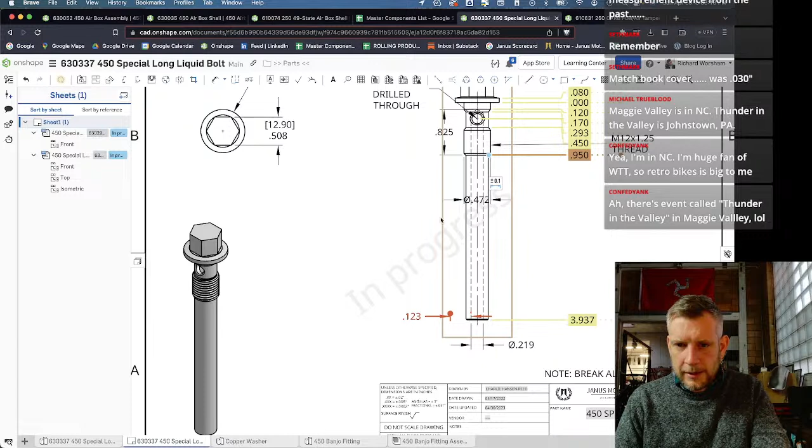And let's see, we'll do this. Yeah, maybe I'll leave it like that, it's a little more clear. Get this guy out of the way.

We are going to have to move this down because when this print was made, we did not have revision tables, which we now do on all of our prints. So we're going to add a revision table in here, and that's going to mean we need to either realign that or move it.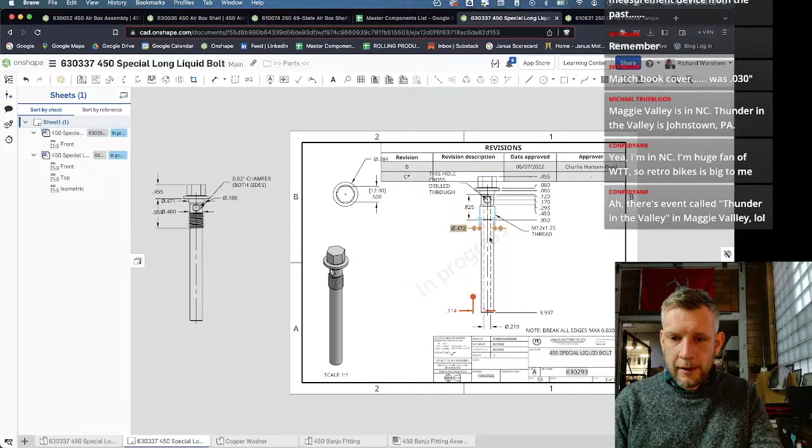So there it is, but we only need 2 rows. I only show 2 rows, the one you're looking at now and the previous one. You don't need to see any more than that, at least in my opinion. We're going to rotate this 90 degrees like that.

Oh, and that's really going to mess up all our dimensions. Let's see, do I need to do that? Maybe I can get away with doing this.

I'm going to stick this in the corner. I'm going to put this guy here. Or maybe right here.

How's it going, everybody? Thunder in the Valley, Maggie Valley. Oh, the difference between Thunder in the Valley and Maggie Valley. Yep.

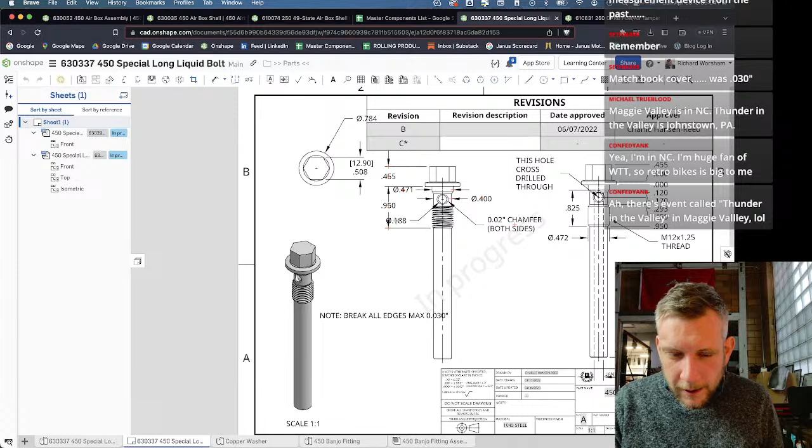Almost done with this. Move some dimensions around. The goal is to make it as legible as possible. I like to just keep all the little arms and legs and numbers in different spots clear from each other. There we go.

And this little note, we're gonna shorten him up a little bit. Like that. And I'll stick him down here where he's visible. This is important, this is the ID, so I wonder if that's not too small. That shows the ID. Yeah, I think that works.

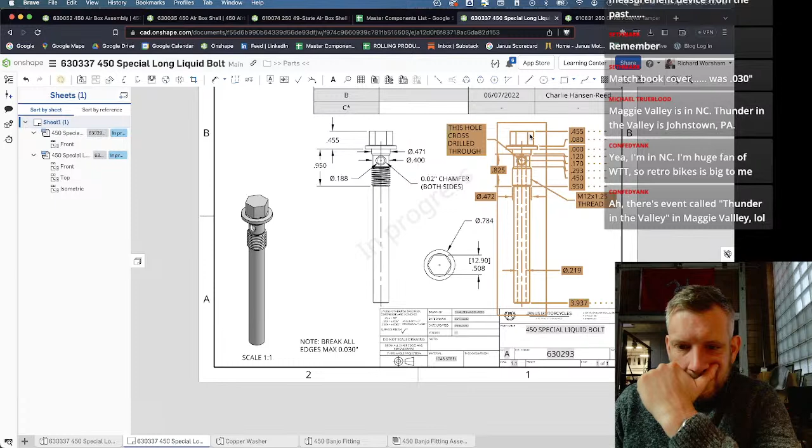All right, what do y'all think? Look pretty clear? Got our steel alloy.

This is a print for the manufacturer, which is down in Tennessee, I believe, Breakquip. Metric thread, metric head, dims in inches. Yeah.

Yeah, it's a good point. We always have done that just because all of our vendors are Amish, or most of them are. I wonder if I can change it.

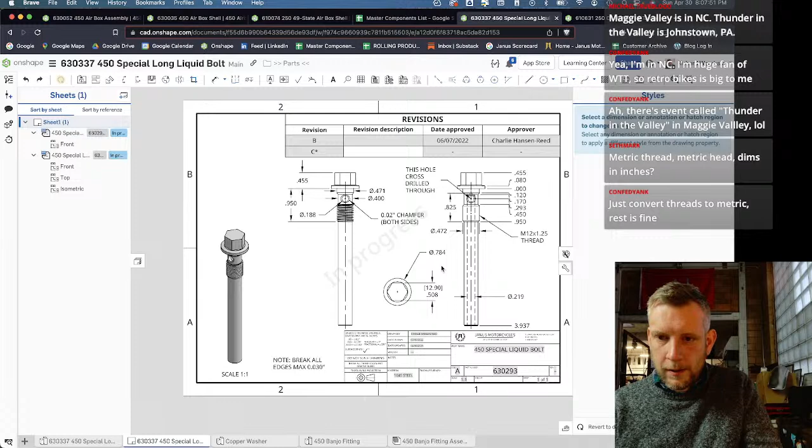Just do that one. Can I do them all? Yeah, I'm not gonna do that. I'm gonna try and do a more universal way of doing that. Hold on here, we're going to go up to our properties.

Yeah, I think we may leave it since we've done it before. Honestly, it doesn't bother me, just observing, get on with it. No, you're absolutely right, that's a good point. It has worked really well for us in the past, but I think we really do need to be more consistent with our dimensioning, especially when moving between two different standards like that, two different units. It's not something we often do, which is probably the main reason.

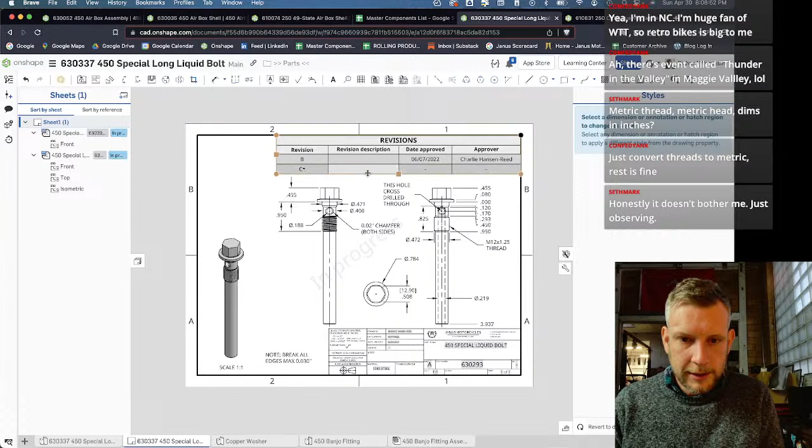I'm going to go ahead and release this one, and we can update it differently. But I want to wrap this up with y'all. So let's go ahead and just do a quick little title here. It's going to say extended standpipe, whatever that means. And we're going to make a little revision note right here next to this guy.

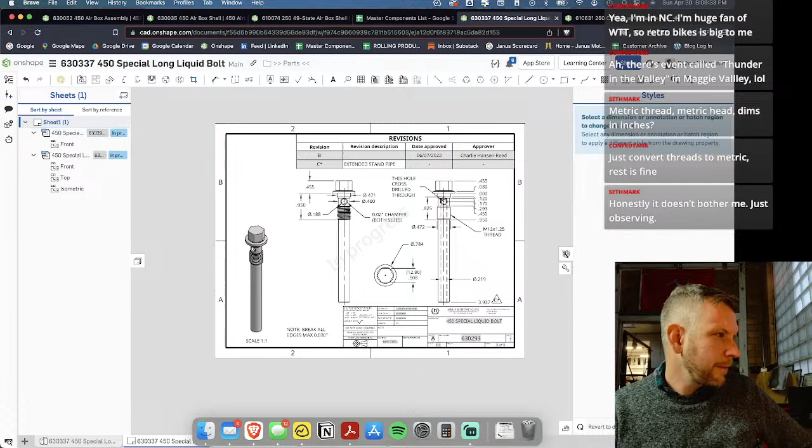At the tail end of Friday's live stream, someone asked about updates to the chain guides for the 450. Were there or will there be updates to the chain guides? Tell me more what you mean by that, curious. What do you mean by the chain guides? I'm wondering, like the chain tensioners, and if so, what you heard was updated. We are going to be listing soon a nice chain alignment tool, which is going to make chain alignment a lot easier. So anyway, there you go.

We've got this up here. Let me just make sure we're ready to go. I think we're good.

Seth says, I'm not being critical, you might have noticed I'm fascinated by Janus lately. It's fun to watch a manufacturer grow. I've done it multiple times, it's nice, it's not my problem. Yeah, tell me about it, I don't know what it's like to not be my problem. No, that is fantastic, your criticism is well received. I love it, that's why we're on here, that's why I'm enjoying these ramble streams. I really, last one, I really got a kick out of the back and forth.

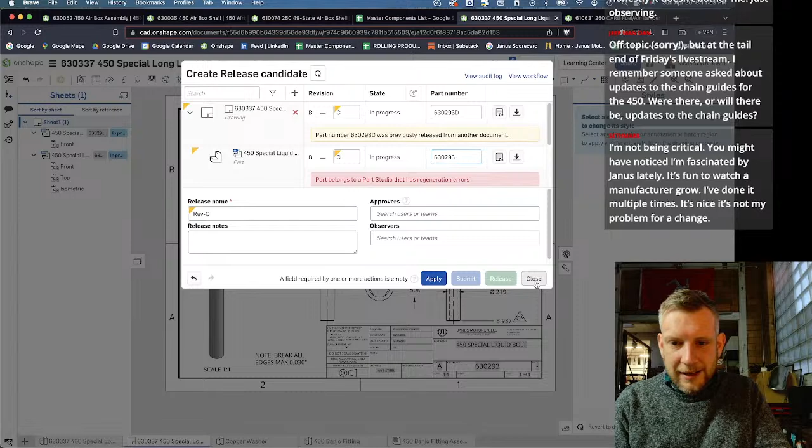Rev C, this part belongs to a Part Studio that has regeneration errors. That means it's not going to let me release it. So this really may be outside of my... this may take a little longer than we're ready for. Let's see what the regeneration errors could be. Nothing wrong here. Why is it not letting me...

Release? Oh, he's got a configuration. So this is a result of some of the stuff that Charlie's done, so I might need to spend more time digging into what's going on here. So here you go, you can actually see with the banjo on there. I'm going to delete these because they're part of a separate design, so I don't really need them in this since we've already tested all this stuff out. So let's see if it'll let me release now.

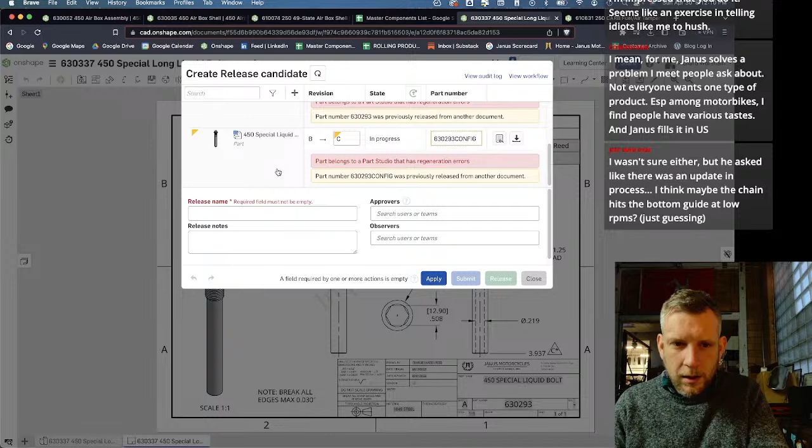No. Huh. Yeah, this definitely has something to do with the... I'm wondering if it's this guy. This is threaded, this is not.

Well, I think what we're going to do is say we are ready to release. I've got to work out a couple of little kinks in the actual release process, but it's mostly done. I think it's 8:12, it's about time we wrapped up. Man, this has been fantastic, I've really enjoyed this, it's great, all these comments, so much fun.

Seth, yes, he says, I'm impressed that you do it. Seems like an exercise in telling idiots like me to hush.

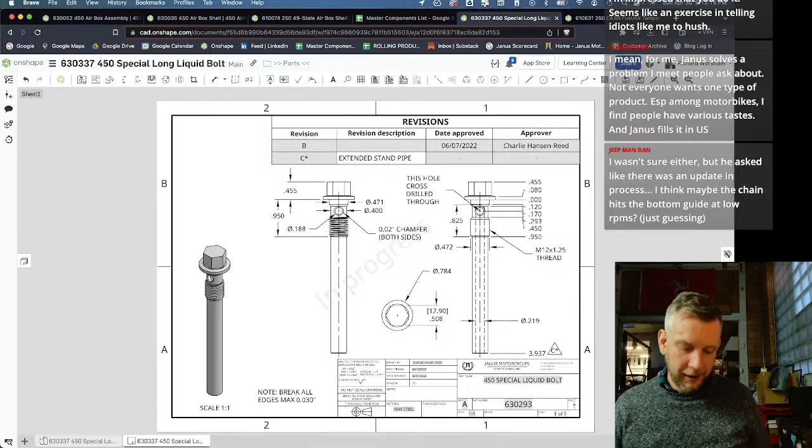No, it's not, actually, you can tell I'm paying attention, it's great. I was not trained as an engineer, I'm trained as an architect. Actually, my father taught me how to dimension a drawing, and architectural dimensioning is more about how it looks. Well, I mean it has to carry, but it really emphasizes... He was trained by an older draftsman down in Kentucky, Bowling Green I believe, or Frankfort, Kentucky. They don't train you, or they still don't, or they didn't at least train you how to actually draft in architecture school, which is kind of amazing. You really pick that up in the studio, in the firm, and the firm would take you under their wing.

Part of getting your licensure as an architect is accumulating hours, years in most cases, working on projects. The draftsman, typically not an architect, that was their job historically. Look at some of the great architects like McKim, Mead and White or Carrère and Hastings, they had incredible draftsmen whose job was to represent the designs of the architect. They were masters of rendering, stippling, adding the little speckle to concrete in a section view, because it was all done by hand. Just absolute masters at this stuff.

He was trained by an old draftsman who taught him how to draft and do lettering and everything like that. What dimensioning I do, and what little I know, I learned from my father. But I did not learn about engineering dimensioning, so I'm always open to feedback.

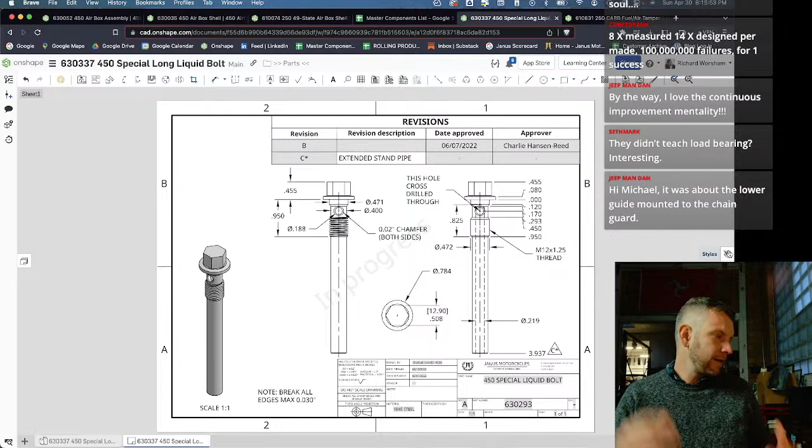Jeepman Dan asked about an update in process - oh, he's talking about the chain adjusters, maybe the chain hits the bottom guide at low RPMs, just guessing. Yeah, there was an update. We did make an update to the swing arm to prevent the chain hitting. We have slider blocks, so if anybody has questions about that or is having issues, just get a hold of us, we do have a fix for that. That's on all the new bikes, but some of the earliest bikes have the lower one and don't have an upper one. So we've added that, and there's an easy conversion kit if you need it.

Michael Trueblood, he may know that as a chain guard. Yeah, that's what I think he was talking about.

Seth says, precisely in January I didn't know Janus existed, by March I bought one, it was salve for the soul. Oh, that's awesome, really glad you're enjoying the bike.

Confed Yank says, 8 times measured, 14 times designed per made, 100,000,000 failures for 1 success. I hope it's not that many, but yeah, sometimes it feels like it. By the way, I love the continuous improvement mentality from Jeepman Dan. Yep, I wish we could do even more of it, honestly.

Seth Mark says, they didn't teach load bearing. Interesting, yes - in architecture school, I'm not saying we didn't do any engineering, I was just mainly referring to engineering dimensioning in a print. We did take a structures class, which for the longest time I had called, what was it called, Engineering Simplified - basically engineering for idiots. That's what the architects call it, because we know it's not what you're getting in engineering school. But we did basic engineering for building construction, point loads and dead loads and how to calculate, I forget now all the triangulation, vectoring, all that kind of stuff. So yeah, we did do some of that.